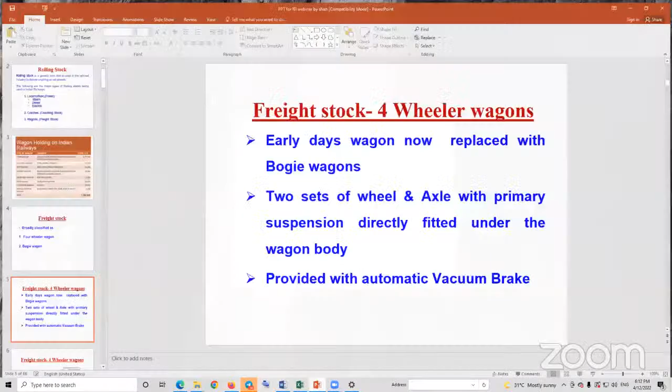Okay. Sorry, you have not received my screen earlier. Now we will start. Are you seeing the screen, sir? Are you getting it? Yes, sir. We can see.

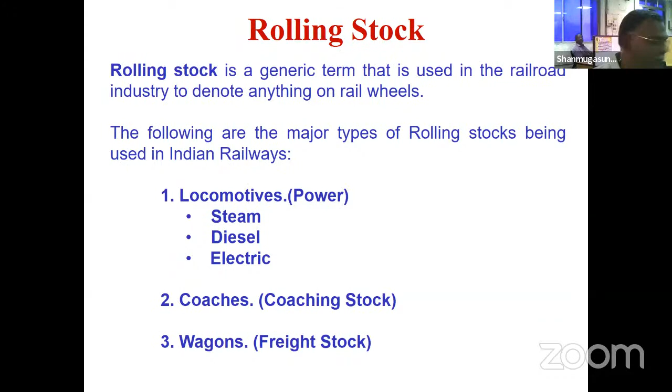So the present holding, the number of wagons we have got in Indian Railways, is 2,86,208. At any given moment, not less than 2 lakh wagons are on movement, which means that millions and millions of tons of materials are moved from one corner of India to another corner, to drive the economy of India.

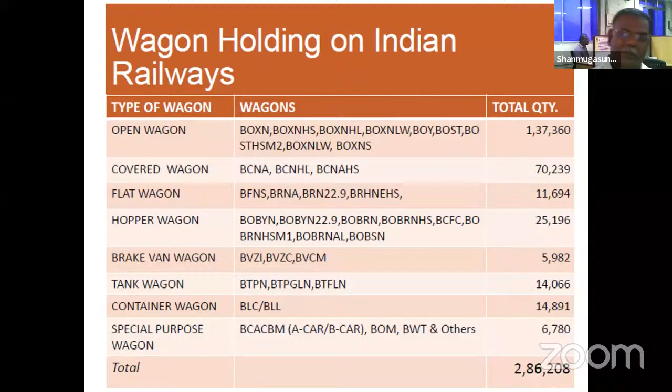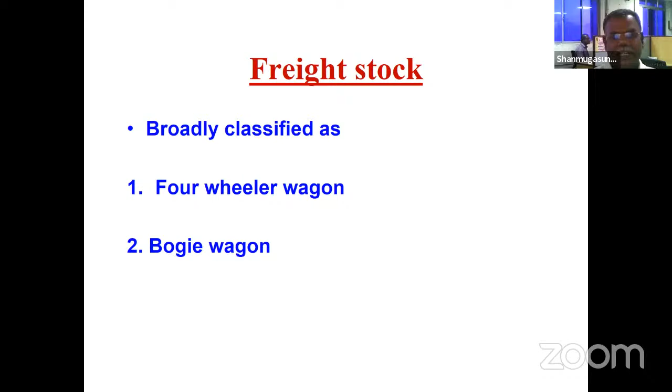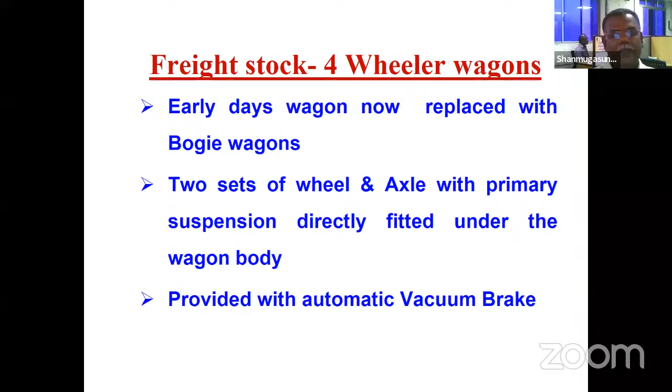The freight stocks are broadly classified into two categories. One is the four-wheeler wagons and another is the bogie wagon. The four-wheeler wagons are the early wagon stocks, which are now getting replaced with bogie wagons. These four-wheeler wagons are the basic wagons from the introduction of railways in India. There are two sets of wheel and axles with primary suspension directly fitted under the wagon body, and they were provided with automatic vacuum brake from day one.

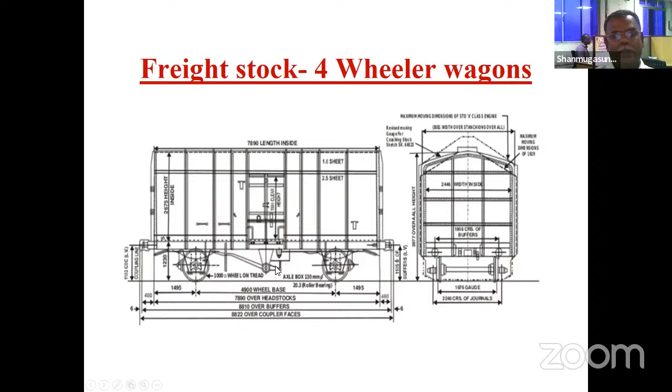Now we are seeing a pictorial view of these four-wheeler wagons, and here this is the guard arm and these are our wheel sets over which we have got our primary suspensions. We have got our hand brakes. We have got automatic vacuum brakes. All these brakes are there.

Further, this is a tank wagon meant for carrying kerosene. Here you will see what is known as the laminated spring, which was used as the primary spring in those days for the suspension arrangement, with two sets of wheels.

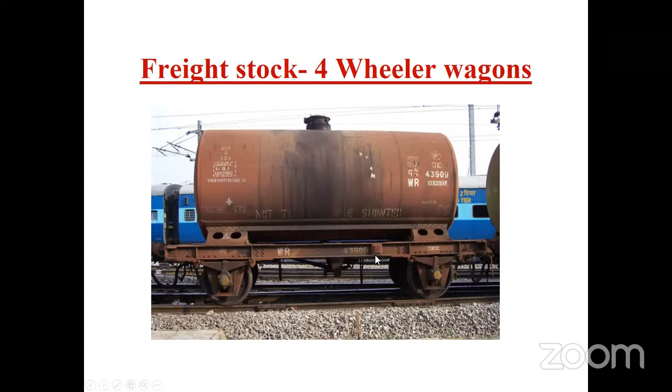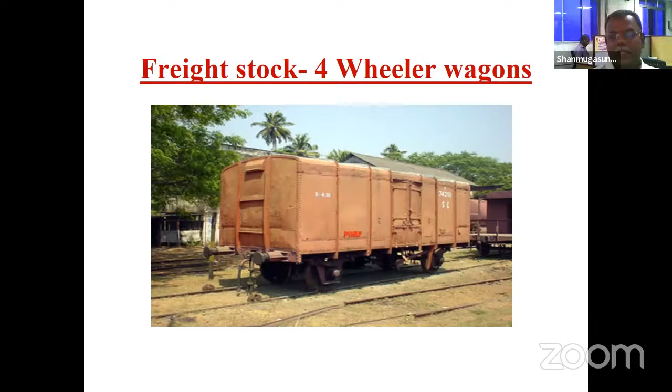And the barrel is mounted over your underframe, which is directly mounted on the wheel sets. This is the old covered wagons, where the commodities which are bagged consignments will be taken, but these have all become obsolete now, only of interest for antique value.

And the modern stocks all have bogie wagons. These are the later versions of wagons and the continuing trend of wagons with 8 wheels. There are 2 bogies per wagon, and the superstructures are mounted over the bogies. The bogie design enables higher speed and better curve negotiability, so they are capable of running at a higher speed.

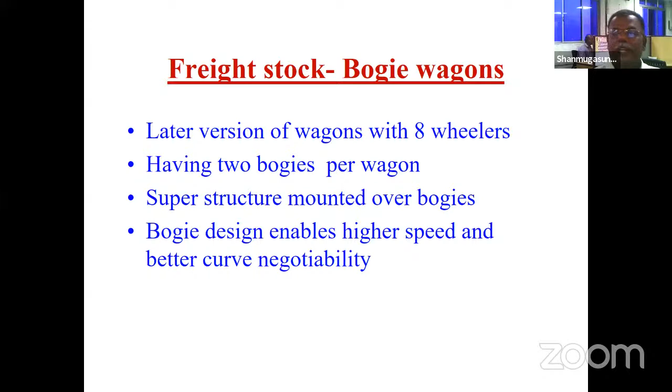And we will be showing a view of these freight stocks with bogie wagons. Of course, this is a bogie wagon with vacuum brake initially started, and now we have got our modern bogie wagons with air brakes. And this is the covered wagons with bogie wagons.

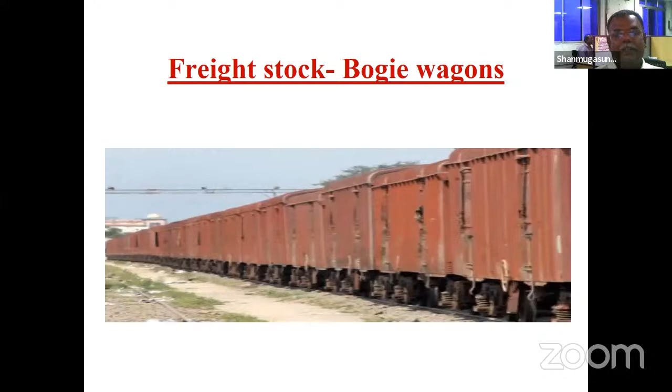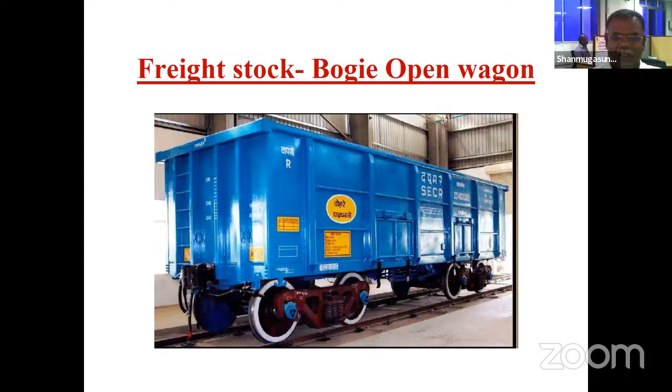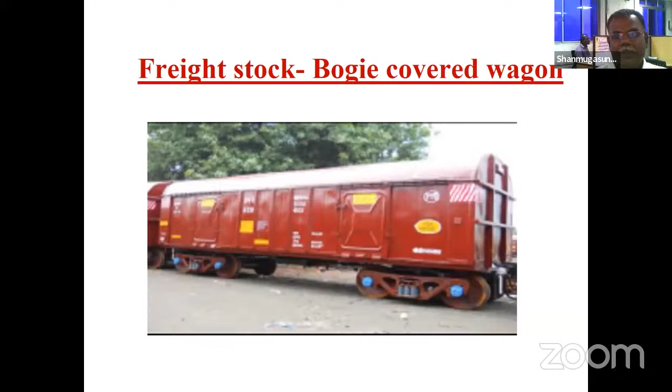And these are the major share of Indian Railways, bogie open wagons, which carry the coal which powers every powerhouse, every house and every industry of the nation. And this is the latest version of the covered wagon, which is meant for moving your cement, food grains, everything from one corner of the country to another, wherever it is needed.

And basically, in the structure of a freight stock there are 5 major components. The main one being the bogie, and the superstructure or the body, which carries the materials, and the underframe, which is the load-bearing member of a wagon. Brake gear, which is the controlling mechanism of the freight stock. The draw and buffing gear, the specialized equipment available in rail vehicles compared to road vehicles.

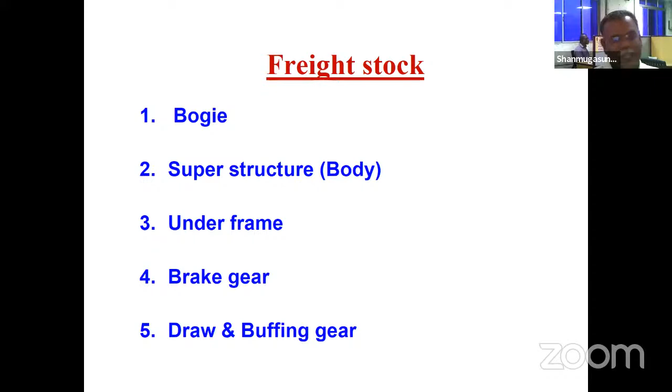Bogie. A bogie is basically an independent unit used under a wagon, with 2 bogies per wagon. Bogies are usually mounted on 2 pairs of wheels, but there are some special types of bogies with 3 pairs of wheels. But in practice, mostly we are using 2 pairs of wheels. Each bogie carries half the load of the vehicle body as well as the contents loaded on the wagon.

And each bogie is provided with a pivot on the bolster for engagement with its counterpart provided on the underframe of the vehicle. The bogie trucks can swivel about these pivots with ease and without restraining the vehicle body while negotiating a curved track. So, when negotiating a curved track, the body will not be subjected to any stress.

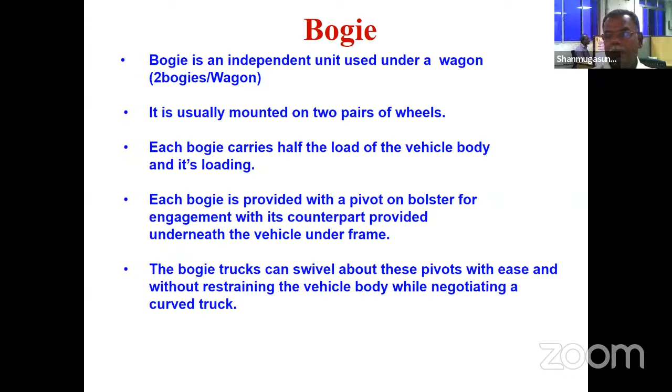And the basic requirements of the bogies are, in a design aspect, it should fulfill the linear condition when running on a straight line, as well as negotiate the curve as designed on the railways. Apart from that, the bogie is the component which has the energy transmission and control in the linear direction as well as in the rotational direction.

You should have roll prevention so that the wagon body will not cause offloading from the track. And you should have the ability to filter out the irregularity between track and bogie. Even though there is some irregularity in the track, it will not be transmitted to the body, and it will not allow offloading to take place, so that the wagon will not get derailed.

And when it is stopped at a wayside station or at the loading or unloading point, it must be in a position to bear the static load, apart from the dynamic load when it is on the run.

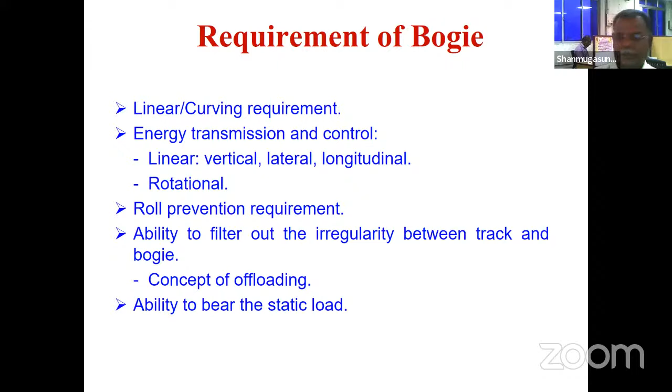And for the freight stock, we have got many types of bogie wagons which have been used. Initially, we had the diamond frame bogie, cast steel bogie, UIC bogies, and the present trend is we are using CASNUB bogies, LCCF bogies, and LWLH bogies. These CASNUB, LCCF, and LWLH bogies are the modern trends which revolutionized the speed of the vehicles.

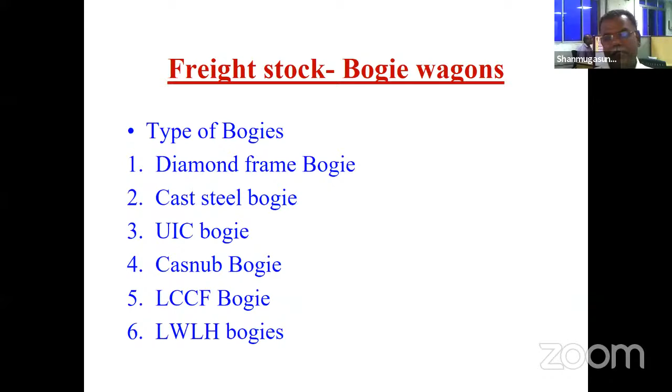Now we are seeing a diamond frame bogie, used for a very long time in Indian Railways. The production has been abolished and the use has been discontinued because of its cost of maintenance and lower reliability compared to modern day bogies.

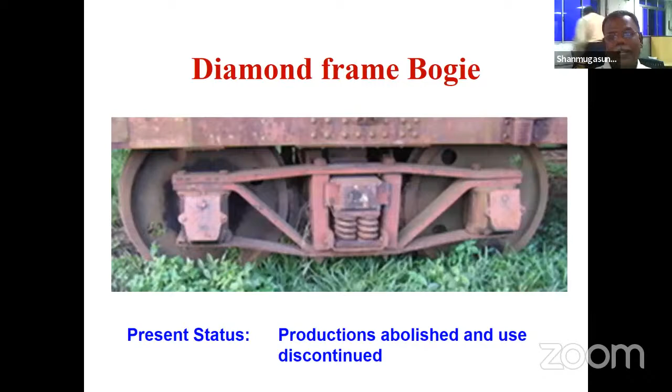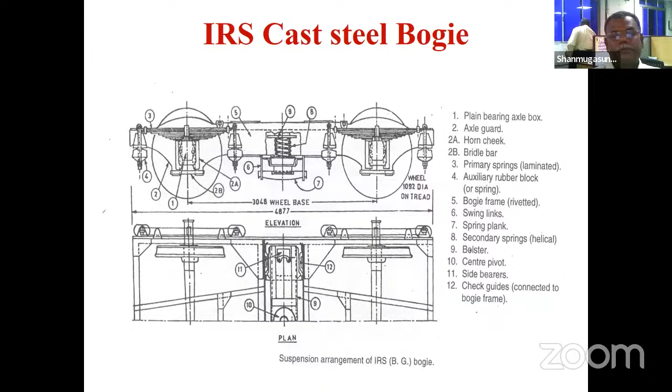And we will see that IRS cast bogie, which has been used in coaches as well as in wagons, with its complicated mechanisms with all riveted constructions. And after that comes the UIC bogie, which can carry 40 box load or almost 3,500 tons of load in a section, in a train.

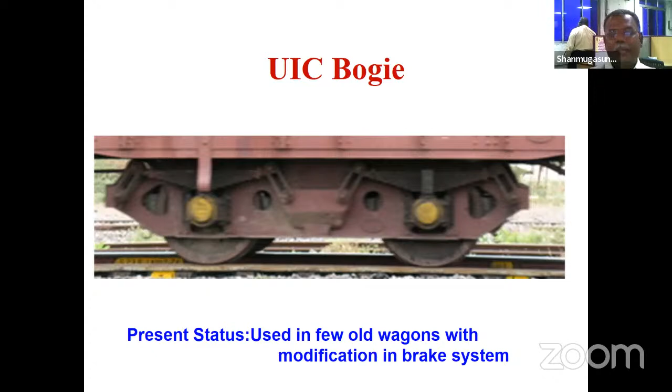The UIC bogie is a International Union of Railways designed bogie, which has been used quite a long time in Indian Railways with vacuum brake, way back from the 1960s to 1990s. And still some specialized wagons are running with these UIC bogies, but with air brake systems modified and fitted on the wagon body.

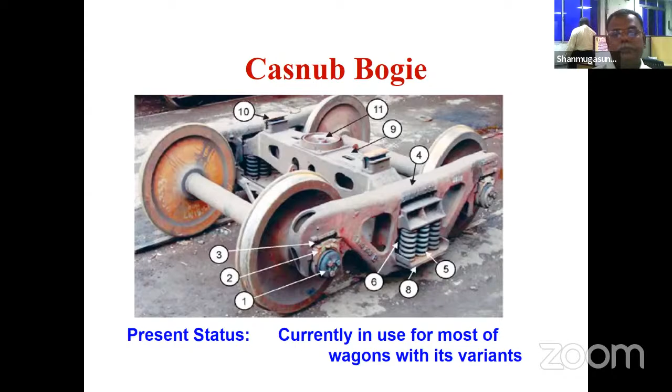There are so many variations in the Casnub bogie. The initial design of the Casnub bogie was 22W, which is not in use as of now. Then, as an advanced version on that, we have got a Casnub 22W retrofitted. Then we came with the first modification codenamed as 22WM. Then we have got another series with narrow jaws, which are coded as 22NL, NLB, NLM, and the latest 22NLC. Apart from that, we have got high-speed Casnub bogies with 22HS coding.

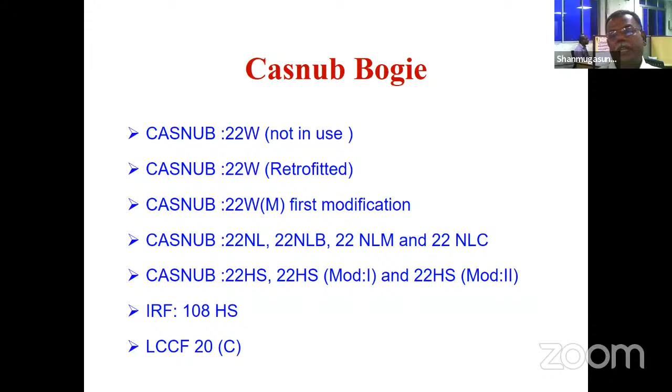And a modified version of these Casnub bogies is our IRF 108HS bogie, and a product-specific LCCF 20C bogie is also available.

We will go for the first Casnub 22W bogie. It has got a wide jaw adapter category without any primary suspension, that is, without any elastomeric pad. And it has got a IRS type center pivot. There is no locking of the center pivot with bolster pin or locking of the bogie with the body. Only by the gravitational force, it will be held together.

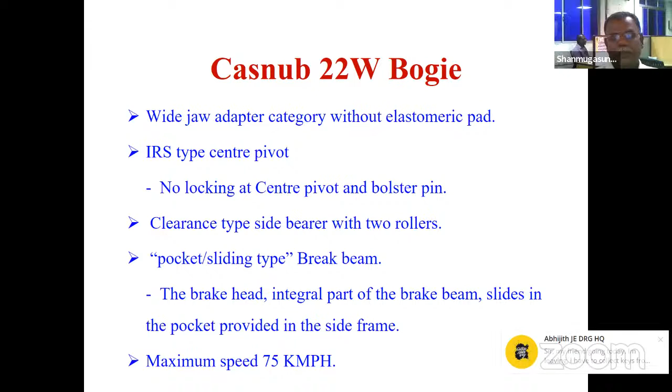And it has got clearance type side bearers and a brake beam with pocket and sliding type. The brake head is an integral part of the brake beam. And the maximum speed that can be achieved with these bogies is 75 kmph.

And we have retrofitted the Casnub 22W to give some flexibility for our wheel sets and some damping at the primary suspension level. We have introduced elastomers in between the bogie frame and the wheel sets, called an elastomeric pad. To accommodate the elastomeric pad, we have got modified wide jaw adapters with lower dimensions, and it has got a constant contact side bearer so that the wagon body is always supported on the bogie.

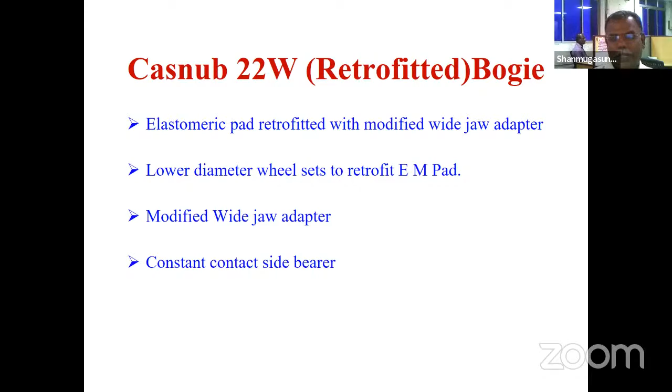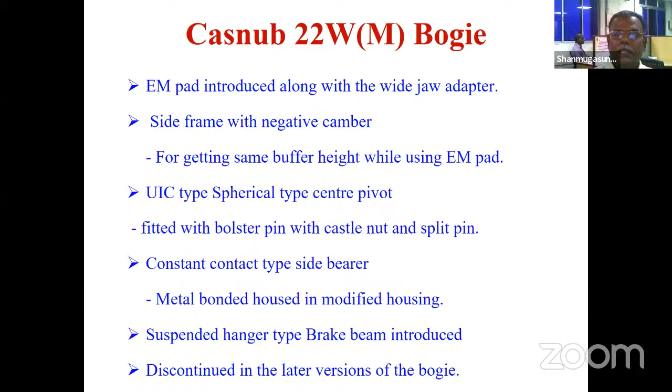Then we have got another modification, the first modified bogie of Casnub 22W. Here, the EM pad was introduced along with the wide jaw adapter, and the side frame, in which the adapter is sitting, is provided with a negative camber for getting the same buffer height, which is one of the design criteria for rail vehicles.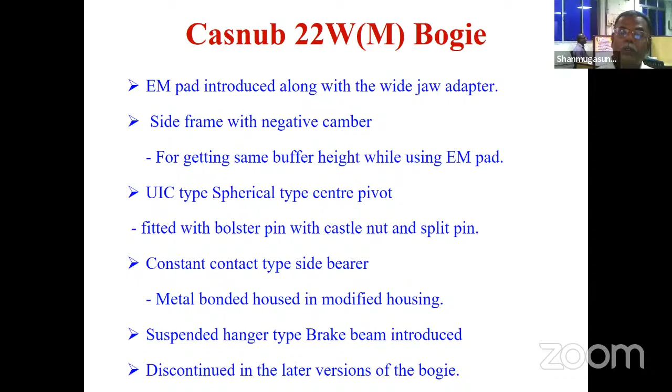It also uses the same spherical type center pivot, but it has got one castle nut and split pin at the bottom. Then it has got constant contact type side bearers, which are metal bonded side bearers housed in a modified housing. And it has got a suspended hanger type brake beam. This version of the bogie was also later discontinued and replaced with modern narrow jaw adapter bogies, which we call the Casnub 22NL series of bogies.

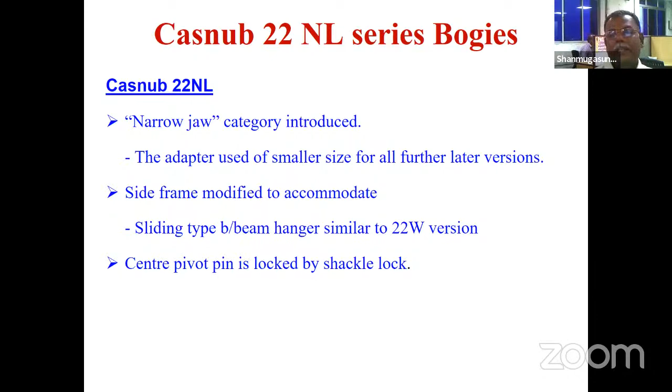The initial design came with Casnub 22NL. This narrow jaw category was issued. The adapter used here, or the bearing element seated in this adapter, is of smaller size, and this has been used as a standard for later versions. This side frame has been modified, again going with the sliding type brake beam because of its advantages, and the central pivot, that is the body bogie connection, will be secured with a shackle lock so that the body and bogie will not get separated during run or any tippling operations during loading and unloading.

The next version is the Casnub 22NLB bogie, or fish belly bogie, where at the center it reduces the total weight of the bogie, the tare weight, so the empty weight of the train has been reduced. Then there is the introduction of the Casnub 22NLM bogie, where the material of the bolster and side frame has been changed, which resulted in saving in the weight of the bogie.

Then the newcomer, the latest version, is the Casnub 22NLC bogie, which can take 25 tons of axle load. These were all used for the wagons meant for iron ore with side discharges.

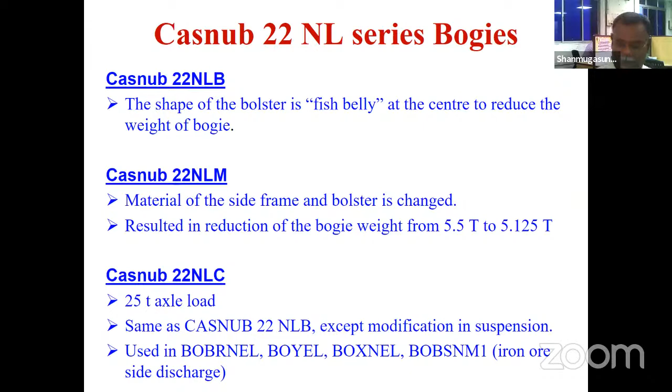Then we came for this. So far, with this NLB, we have raised the tonnage, or the carrying capacity. The other one is, in transportation, we can raise the revenues either by increasing the load on a particular vehicle or by increasing the speed. So in order to cater to the speed, because we are moving at a faster pace, we will be expecting our trains also to move at a faster pace.

So in order to cater to this need, the high-speed bogies have been developed and they are termed as CASNUB 22HS and IRF 108HS bogies. Here also we have got UIC type spherical center pivot and flat center pivot solutions. They are developed for an operational speed of 100 kilometers per hour compared to the 75 kmph and 80 kmph of the earlier versions of the bogies.

It's almost the same type as NLB, except the clearances between the bolster and the side frame have been increased. And we are using elastomer materials of PU type instead of the spring-loaded type in the side bearers, which bear the load of the wagon body on the bogie frame. And it has got two-stage suspension, that is softer in tare, the empty condition, and stiffer load bearing for the gross condition or the full load condition.

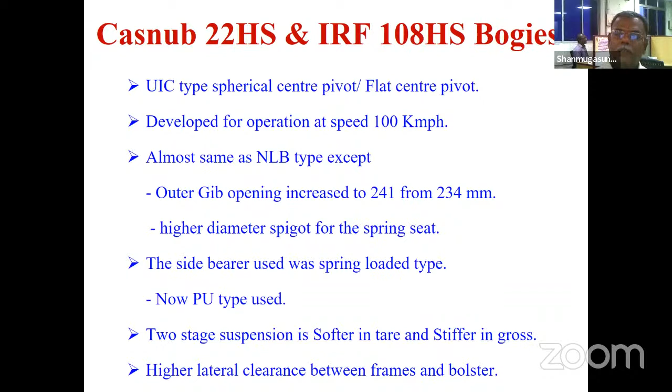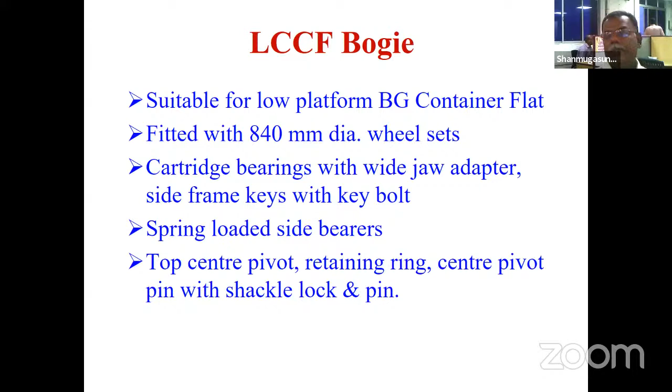The category with wide jaw adapter, side frame key, and key bolts have been provided. It has got spring-loaded side bearers and it has got a top center pivot, retaining ring, center pivot pin with shackle lock and pin to hold. Now we are going to the next item of the wagon, the superstructure.

It varies according to the type and the usage. The general types of wagons are open wagons, covered wagons, hopper wagons, tank wagons, flat wagons, and special types of wagons. Of course, even though there are so many types, all the types contain an underframe over which the body is built according to the type it needs.

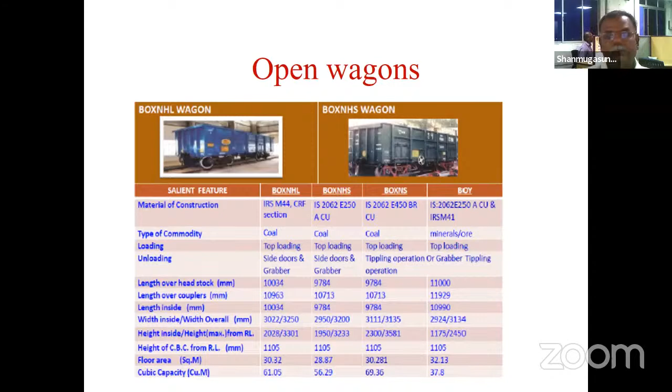The other versions also we are seeing, BOXN HL and BOXN HS wagons. These are all made from the anti-corrosive materials of Corten steels and IRSM 44, what we call copper alloy steels, which we are using to avoid corrosion.

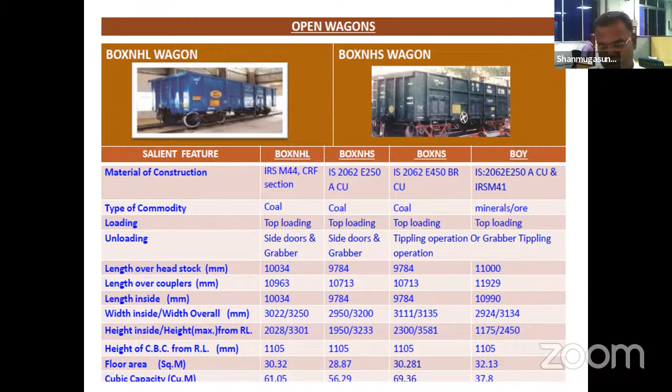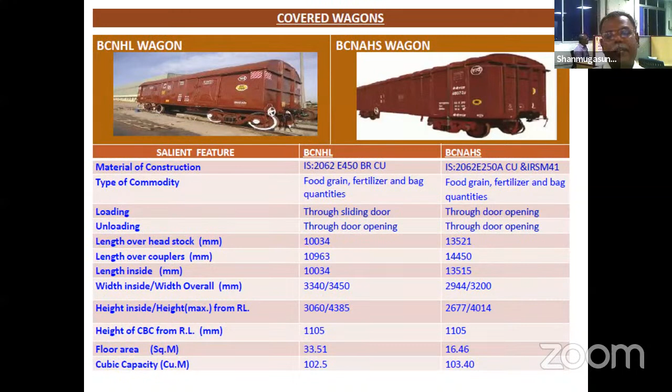The maximum axle load is 22.9 tons for the covered wagons. The tare weight, or the empty wagon weight, is 20.8, and the payload or the carrying capacity of a BCNHL wagon is 70.8 tons. In other words, it carries almost 3.5 times its tare weight while on run. And it can have 58 wagons per train. When your train is done, you will be transporting almost 4,100 tons. If you imagine with lorries, how many lorries would be required to carry such things?

Further, these wagons are fit to run at 100 kmph. Imagine a train running at 100 kmph and traveling from one corner of India to the other corner of our motherland; the time taken will be very less compared to roads. And these speeds are for normal train operations, and these wagons are to run at 120 kmph in our dedicated freight corridors.

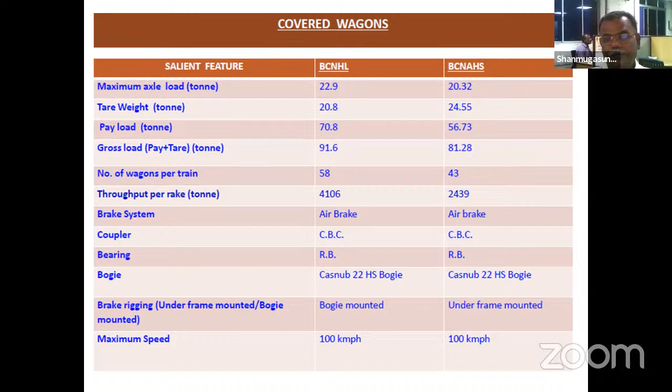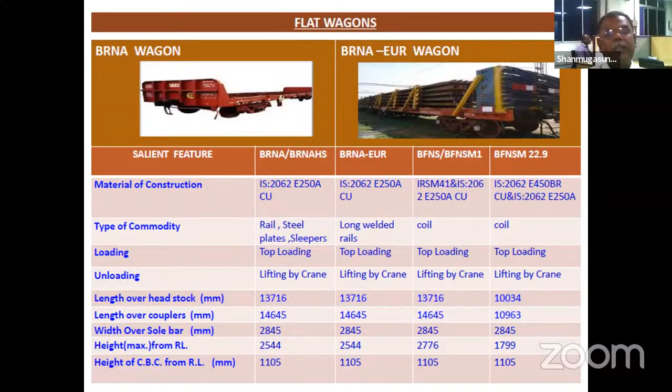And we have got a special type of flat wagons. Now we are seeing two types of wagons, BRNA and BRNA-EUR wagons. You might have seen many boiler constructions and many steel industries. We will be seeing that steel billets and all those things are moving. These can be very easily loaded in a wagon, and these wagons are specially meant for carrying that kind of things. The types of commodities we can have: rails, steel plates, sleepers, steel coils, everything can be done. And these commodities, being heavy, can be lifted by crane.

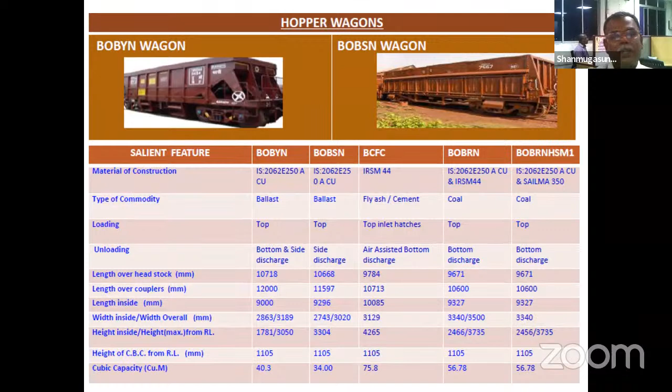And we have got specialized hopper wagons, which enable faster loading and unloading. These BOBYN wagons are mainly meant for ballast carrying for railway use, whereas this BOBRN can be used for coal loading. BOBRN is one of the wagons mainly used by many of the powerhouses in India, with a very short time for unloading as well as loading, which gives more turnaround or more utilization of the train. And it has an advantage of bottom discharge. So when the door is opened, automatically the load will get discharged from the bottom.

And BCFC is another specialized wagon meant for carrying loose cement and fly ash from one area to another without needing packing. It has top inlet hatches through which it will be loaded. And for bottom discharge, in a fluidized manner with air assistance, the cement can be easily unloaded.

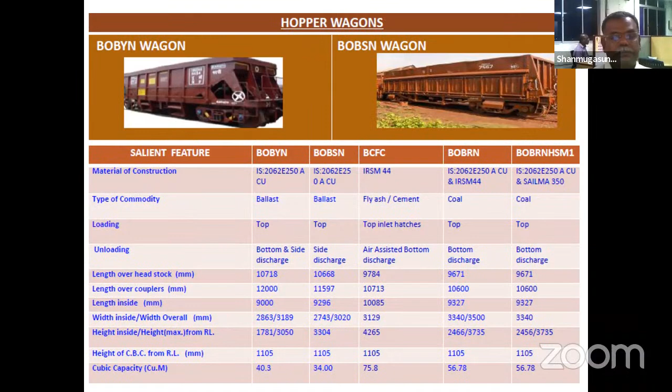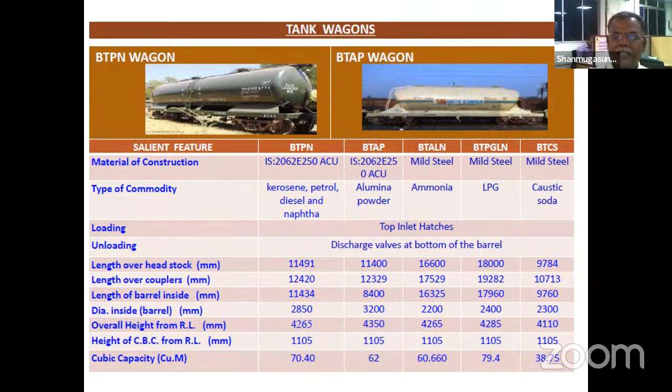So for moving our automobile fuels, we are using our specialized BTPN wagons. They can be used for moving the day-to-day fuels of kerosene, petrol, diesel, naphtha. And we have another specialized tank wagon called the BTAP wagon. It is mainly for carrying alumina powder from one industry to another. And we are carrying hazardous materials also, with inbuilt safety provisions, by a wagon called BTCS, which is meant for transporting caustic soda in a very safe manner, with rubber lining inside, safety walls, safety vents, and all those things.

Now you can see BTPGLN wagons. In India, we have LPG production at one place, or we get LPG through our ports, and it needs to be taken to the LPG bottling plants. How can we carry it? Is it possible to carry everything by road vehicle? So we have a specialized wagon for that, known as BTPGLN wagons, which keep the LPG in the liquid stage itself. It is provided with a CASNUB 22 NLB bogie, and it can run at a speed of 80 kmph. And BTCS is another wagon meant for carrying chemicals or acidic materials.

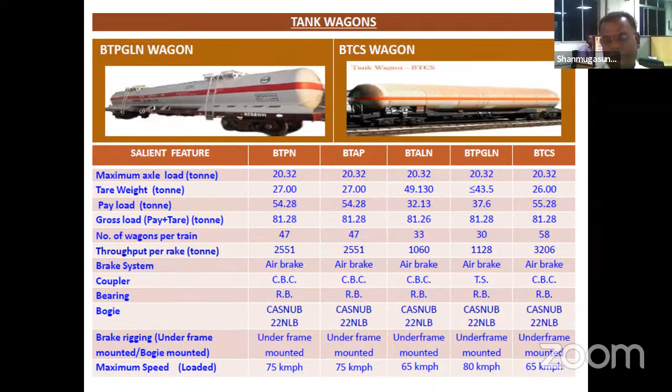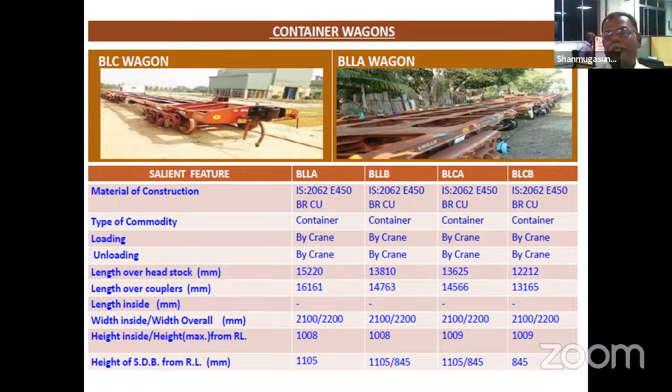To achieve faster movement, we have designed these BLC wagons to have a low floor height from the rails, so the containers stay within the limit of our normal moving dimensions. The buffer height of a BLLA is always kept at 1105 mm from one end, whereas the BLLB is kept at 845 mm, so that the 1105 mm is maintained to attach our standard railway vehicles, while the 845 mm is for a low height carrying capacity, used in train formations to move containers faster to every destination.

These are all the specialized salient features of the container wagon. They are provided with LCCF bogies, as I said earlier, and both BLLA and BLLB will be available in a train. BLLA wagons are attached at the ends of the consist, so two BLLA wagons intermediate with three BLLB wagons form one consist, and we can have up to 9 consists in a train, running at a speed of 100 kmph.

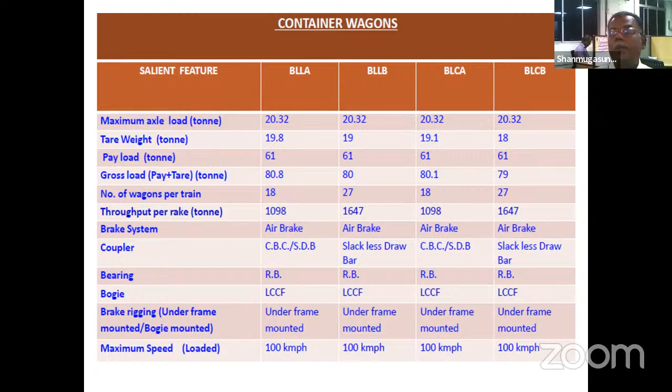Then we have BLCA and BLCB, which can have 45 wagons in a train, also running at 100 kmph. Nowadays we have modified versions of these BLC wagons which can carry double stack containers. This is not yet available on our route, but they are already running on our dedicated freight corridors and part of Western Railway, where we can augment the capacity of the train by doubling the number of containers it carries.

We also have a specialized special purpose wagon. In our Chennai belt, we are almost the automobile hub of India, producing many SUVs, light compact vehicles, and two-wheelers. But our end users and customers are spread all over India. Imagine a person purchasing a car in Jammu and getting it delivered from the Chennai factory, traveling all those kilometers on its own wheels — how much wear and tear it would suffer.

Suppose it is transported by specialized road vehicles — those can carry only 2 cars at a time on a truck. But we have a solution for that. We can see how the cars have been stacked inside the wagon. Each wagon can transport almost 6 plus 5, that is 11 cars, and it is double stacked. At the bottom deck we have 5 cars and 6 cars on the top deck in the end wagons, and in middle wagons we can have 12 cars, so 380 cars can be transported in a single train. It is more cost effective compared to road transport.

The speed of the train is 65 kmph, and we have many private operators using these wagons for transporting automobiles from our Chennai belt to end users in Delhi, Bombay, and the Northeast.

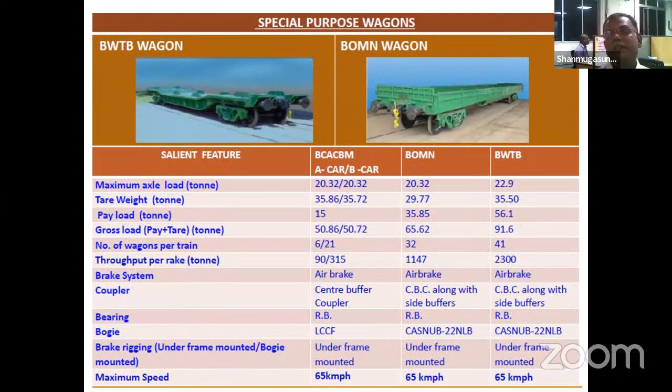Now we have seen the various types of wagons in use. Next we will go into the construction details or basic engineering details of the wagons.

In between, according to the type of wagon and the type of loading, we will have crossbars and stringers attached to it, and it provides the skeleton for the wagon body.

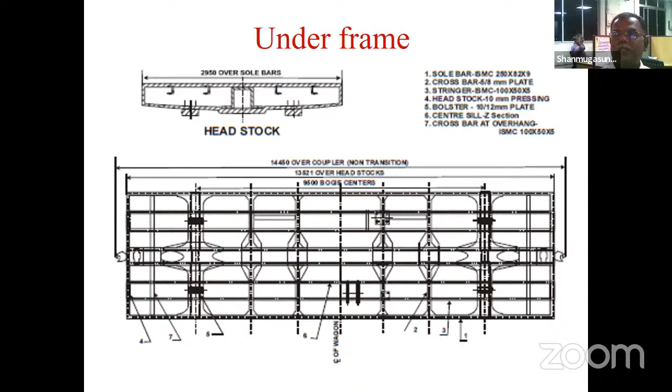Now we have seen the construction, and how much speed our train can run. Next we look at how we can control a train, because we know any vehicle run by a prime mover has to be brought to a stop when and where we require. That is provided by the brake gear. The brake system of a railway vehicle is different from other things, and the requirements differ.

The brake gear or railway wagon brake system needs the following: the brakes of the wagons need to be controlled from the locomotive or train engine, from where the train operator operates the train. Unlike an automobile, where the control is within the same vehicle, the system should be designed so that it has automatic braking in case of unforeseen conditions like a parting or a derailment. In all those conditions, the train has to be brought to a stop by itself.

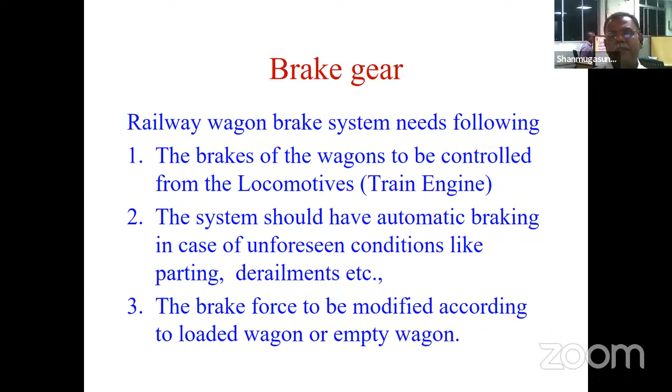Especially for the wagon stock or freight stock, when we look at any type of wagon, its tare weight or unladen weight, the empty wagon weight, is around 20 to 25 tons, whereas its carrying capacity is more than 3 times that. So the loaded braking force required will be almost 4 times that of its empty condition. So it needs some specialized mechanisms so that we have 2 differential braking forces acting whenever needed. This is the specialized need of a railway freight stock.

And we can see here from this formula the max. However, if we want to increase this, we cannot increase the brake force, because even though we are applying it by a clamp brake, the vehicle's dynamic movement can come to a stand only by the adhesive force between the rail and the top of wheel, like your tire and the road in an automobile. And this is driven by a formula.

This total adhesive force maximum depends upon the wheel-rail adhesive coefficient, mu, which is normally 0.3 for a dry rail and reduces to a level of 0.22 for a wet rail in monsoon conditions. M is the mass of the moving vehicle and G is the gravity constant. Thus, mu and G may also be taken as constant, but the mass of the vehicle is the varying factor.

Thus, the braking force for an empty wagon is restricted compared to a loaded wagon. Suppose we have the same braking force for an empty wagon- when the brakes are applied, the wheels will come to a sliding movement over the rails. Even though brakes are applied and the wheel is not rotating, the wheel along with the vehicle will slide over the rail, which is an undesirable effect. This causes faster wear on the rail, which we call wheel burn, and wear on the wheels, which we call flat tires, and this is one of the causes for spalling and other issues.

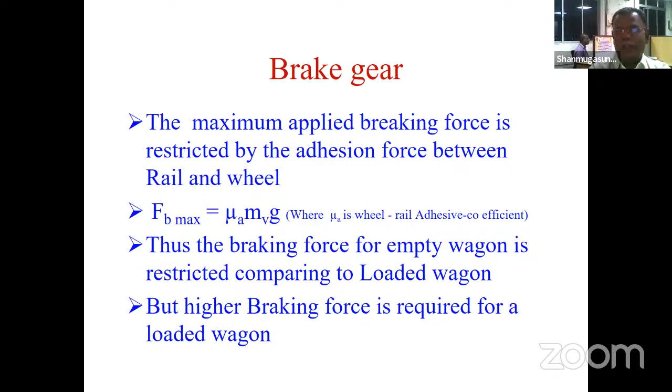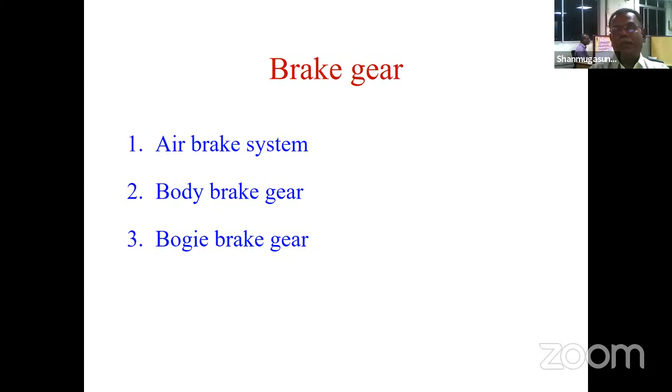Basically, the brake gear or brake system contains three mediums. One is the air brake system, which is the medium or controlling method by which the driver or loco pilot controls the entire train's brakes on the wagons from his controlling console situated in the locomotive. Then we have the body brake gear, which has the brakes, linkages, and multiplication factors according to the type of wagon. And we have the bogie brake gear, which has the brakes applied on the wheel sets by clamp brakes.

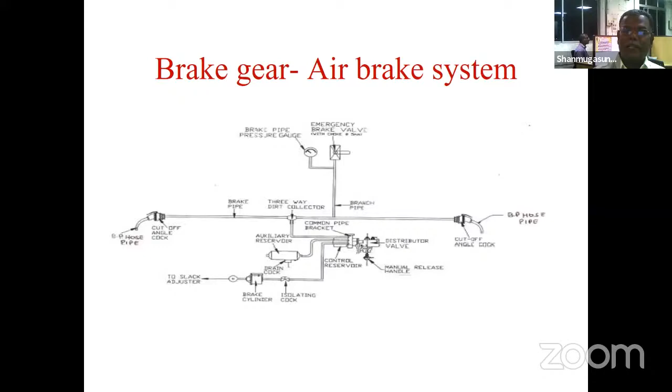Now we are seeing the air brake gear, that is the air brake system or pneumatic system by which the brake force is created inside a wagon. Here we have a controlling mechanism, the brake pipe, running throughout the train, where we send a signal of 5 kg pressure as brake pipe pressure. We have a distributor valve which senses this brake pipe pressure and supplies air to the brake cylinders, converting the pneumatic pressure available according to the loco pilot's desire into a mechanical force. The brake cylinder is a converter used to convert the pneumatic force into mechanical force.

For that, we have two levers attached, imposed between two levers- one is called a live lever, another a dead lever. By modifying the arrangement, or by locking any one of these two levers or tie rods, we vary the effort applied, or change the leverage ratio according to the need, whether it is required for an empty or loaded wagon. For an empty wagon, we have a lesser leverage, so the force acting at the brake head, or brake block, on the wheels will be lower for an empty wagon, and higher for a loaded wagon.

In between, we also have a brake regulator imposed in the system, so that whenever the cast iron brake blocks or composite brakes get worn out, the slack is taken up by these slack adjusters, so that we always have the exact time as desired and designed for the brakes to apply in the brake system.

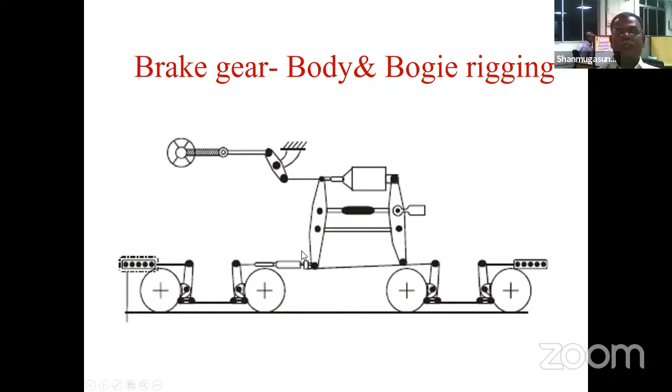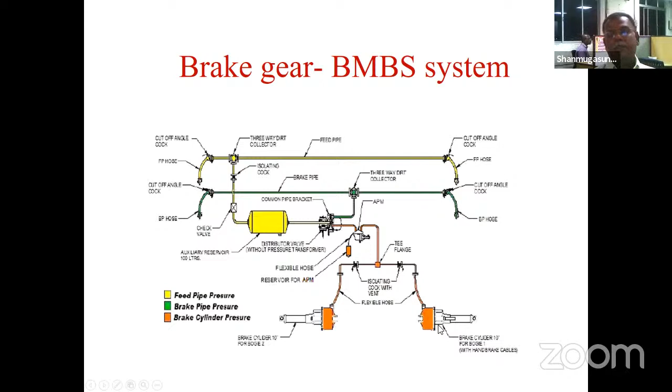And this is the system for this one. Initially, from a distributor valve, we will be supplying to the brake cylinder, whereas here we will be supplying through an APM or automatic pressure modifier to the brake cylinders, and each bogie will have one brake cylinder which is mounted inside the bogie itself to apply the force.

Now we will see the arrangement of this bogie mounted brake system. Here you have got a brake cylinder. When it is applied on the fulcrums, it will expand and make the springs move, and the brakes are applied over the wheels.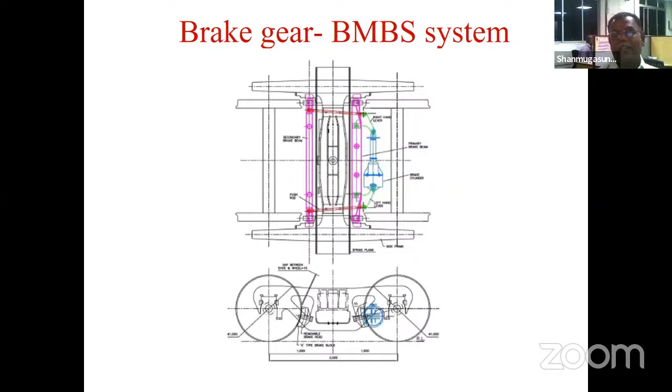And as we said earlier, we need some mechanisms to modify the force between an empty wagon and a loaded wagon. How are we going to achieve it in a bogie mounted brake system? So here we are modifying the pressure which we are applying into the brake cylinder. Here we have got one sensor or APM. It senses the loaded condition or empty condition of your wagon based on the fluctuations of your suspension.

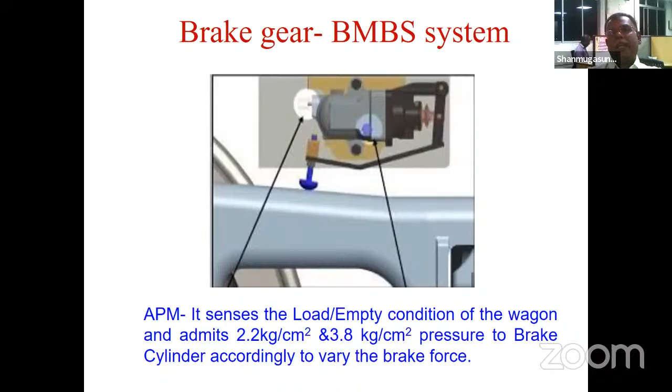And when it senses your wagon is in the empty condition, it admits just 2.2 kg per centimeter square into your brake cylinder, with a lesser brake force, and it supplies 3.8 kg per centimeter square when it is in loaded condition, and it varies according to the requirement of the brake force, and thus we will be applying the two-stage braking as required for an empty wagon as well as for a loaded wagon.

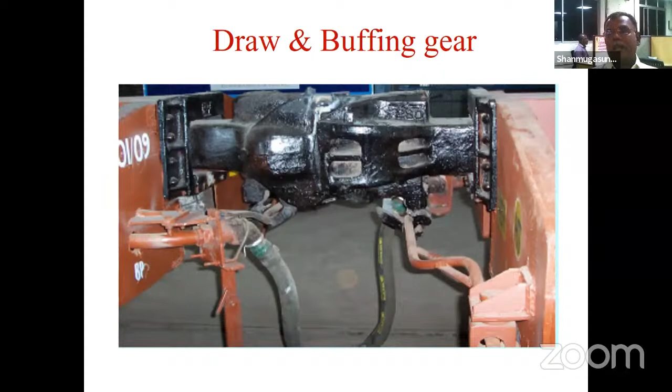And next we are going for the draw and buffing gears. This is another factor peculiar to railway wagons. Unlike road vehicles, a train, as we have said, contains about 58 vehicles, and the driving force from the train engine has to be transmitted to the entire wagons to pull. So one of the components we have provided in each wagon is called the draw and buffing gear. It has to take the draw or pull force of the locomotive for driving, as well as, during controlling from the locomotive or when negotiating a down gradient, it has to absorb the shocks between the wagons.

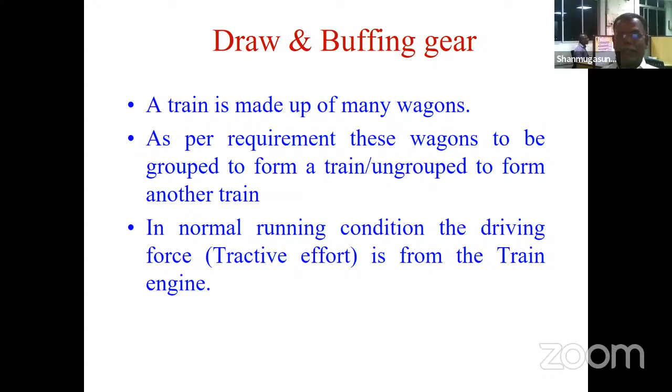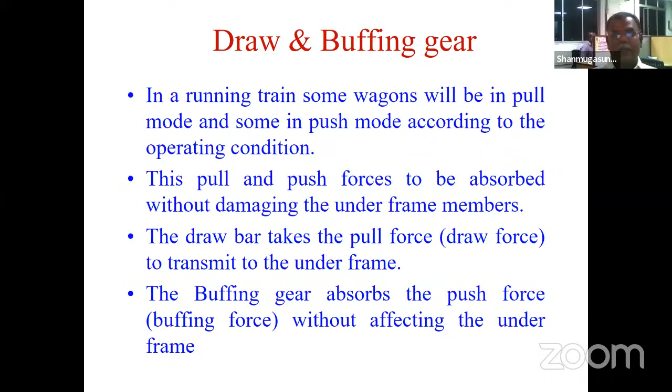So a train is made up of many wagons. As per requirement, these wagons are grouped to form a train or ungrouped to form another train. In normal condition, driving force is from the train engine. In a running train, some wagons will be in pull mode and some in push mode, so a buffing force and a draw force are there. So, if it is uncontrolled or undamped, it will cause damage to the underframe. So, to avoid that, we have imposed these draw and buffing gears.

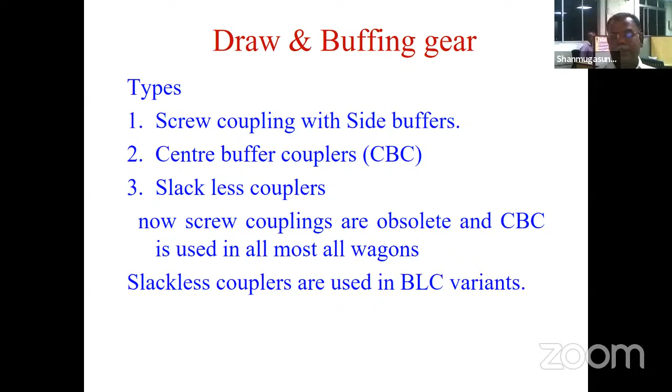There are many types we have been using. The screw coupling with side buffers is the initial design, and the latest designs are using CBC and slackless couplers. The screw couplings are gone. CBC is used in almost all wagons, and slackless couplers are used only in specialized BLC variants. Now we will see the CBC. This is an exploded view of the CBC components.

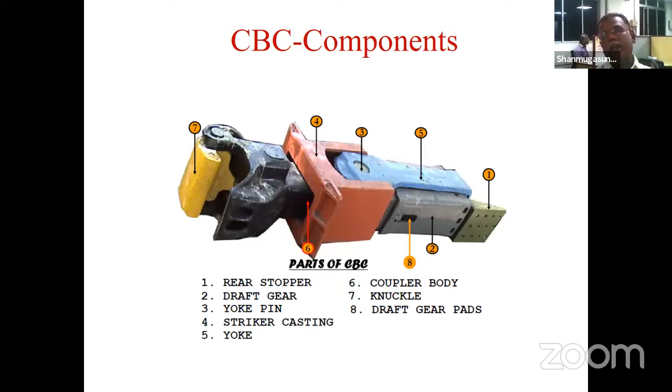Here we have got the components. This is the coupler head, and we have got a knuckle which can couple the two couplers and take the vehicle front or back. And to transmit a buffing force, we have got a buffing case here. It will take the draw forces with a yoke connected by a yoke pin, and the rear stoppers and front stoppers will be attached to the vehicle body. So the force transmitted through this CBC will be transmitted to your underframe, and your vehicles will be either pulled or pushed according to the requirements. And here we will see the exploded view of the CBC components.

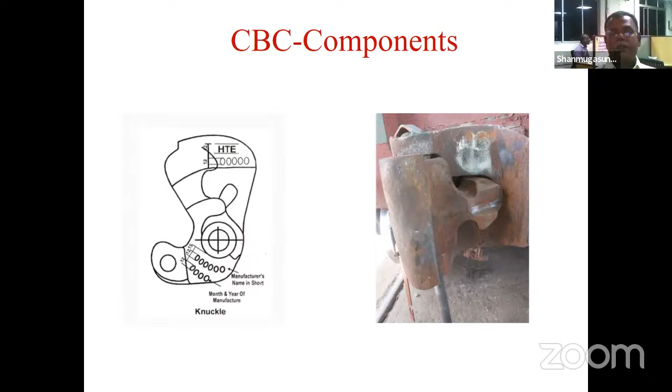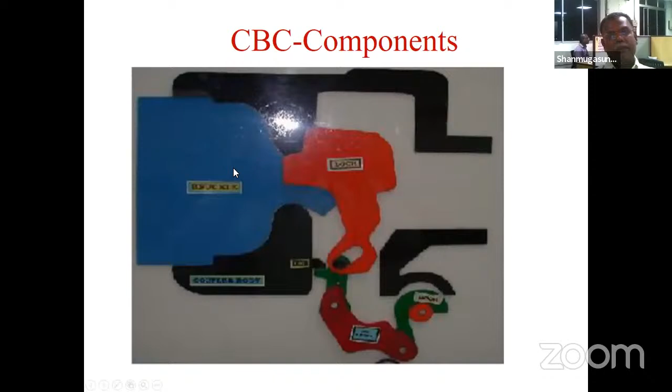This we call the coupler body, which carries the major force. And this is the knuckle, which will be used to couple between the two CBCs. And to keep the knuckle in position, we are using a component called a lock. To operate this lock, we are using these rotary levers. And this is the arrangement by which this lock will sit inside the knuckle to keep the knuckle in position, or the couplers are locked in position.

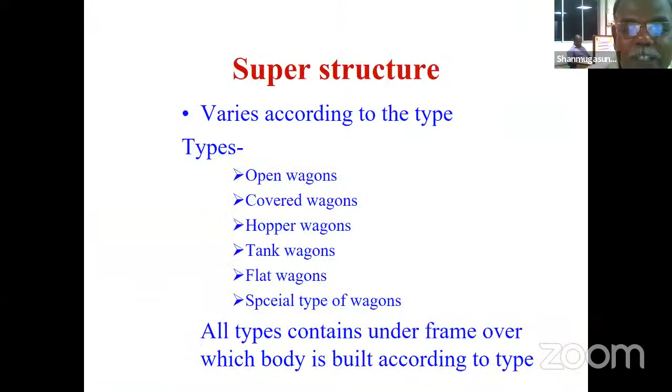I said 8-wheeler wagons, but it is still 2 bogies, each with 4 wheels. All my bogies will have 4 wheels only. So 2 sets of bogies will be mounted on a wagon far apart. So the curve negotiability will be with the wheel sets mounted inside the bogie. Earlier, these 2 wheel sets were mounted on the wagon body itself. So the wheelbase, the distance between the 2 wheel sets, was more, and it had some problem in negotiating the curve.

Now we are reducing the distance between these 2 wheels. But these 2 bogies will be at the 2 ends, and they will have a swiveling mechanism through the centre pivots with the body. So these bogies will turn, whereas the body need not turn. So these wagons can very well negotiate a curve, even a sharper curve than a 4-wheeler. Have you got the point, sir? Yes, I understand. That is the reason why these bogie vehicles are capable of running at higher speed than our 4-wheeler wagons.

Nice. Sir, one more question. You have shown many times the leaf springs, right? Why don't they go for other spring systems which are available, especially for wagons? Sir, initially we started with the leaf spring, but now we have got advantages of going for the coil springs.

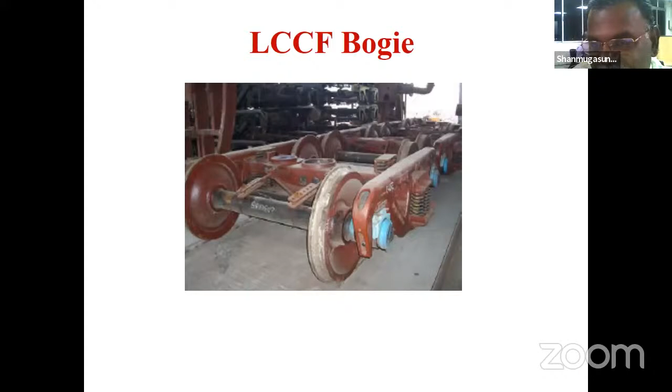Okay, sir. Sir, now I'm studying second year, sir. So when shall I write those exams, sir? That is at the end of your final year exam, you can write. What we are expecting normally is you are expected to be a qualified engineer when you are entering the service. Okay, sir. Thank you, sir. Thank you, ma'am.

Any other questions, sir? Yes, sir. So there are no questions, I think so. So yeah, it was self-explanatory and it was a good interaction as well, sir. So thank you so much for the opportunity which has been taken care of by Veerasamy sir. So thank you, Veerasamy sir, for arranging such a wonderful meeting that we could understand what all the bogies are doing in railways. So it's not the bogies alone. We always look at a perspective like railways bringing a lot of revenue, it's all because of the loading and unloading. So that is the largest part of the revenue. But we don't know what is the engineering behind it.

But now IEI TVLC has made it possible, it has given an insight into what is the bogie and how the braking and other engineering activities are done. And such a calm and polite, humble person, Shanmugasundaram sir. So it is a good opportunity to interact with you, sir. But it is virtual. One day we will come over there and visit your place as well, so we can also have an interaction, sir. So it is a good opportunity that we have met today. So we network further, sir. So thank you so much for this wonderful lecture, sir.